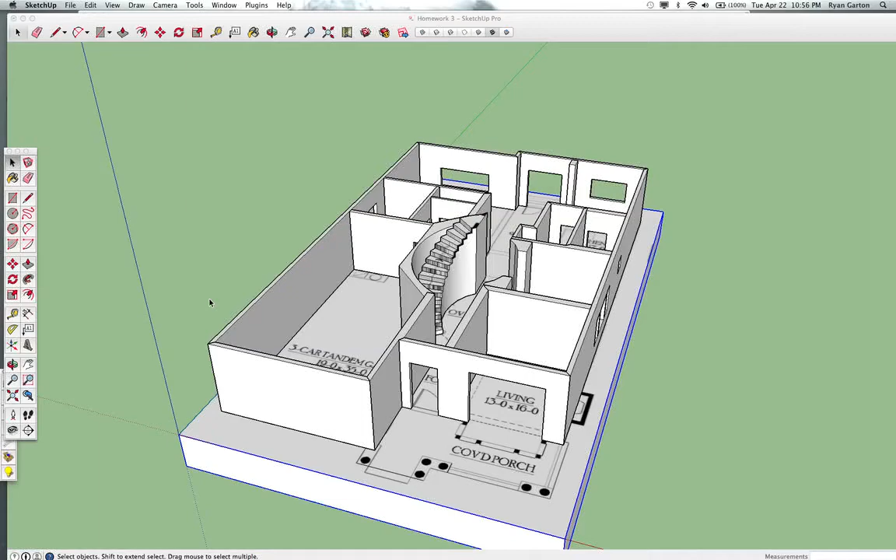Now that the hard part is over, let's do another projected texture to get our porch and start moving some of this stuff down. So I would say that the slab itself should be a separate piece from the actual ground it's sitting on. Let's go ahead and trace using this material below the slab.

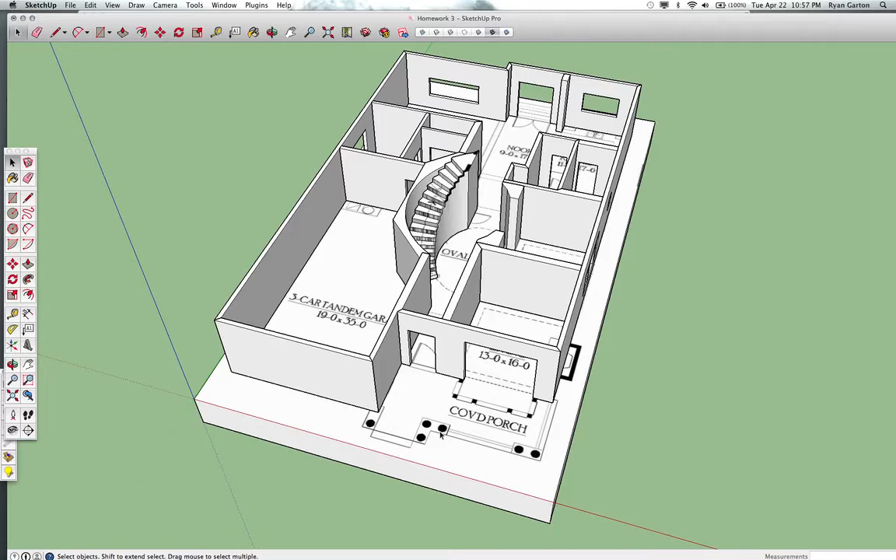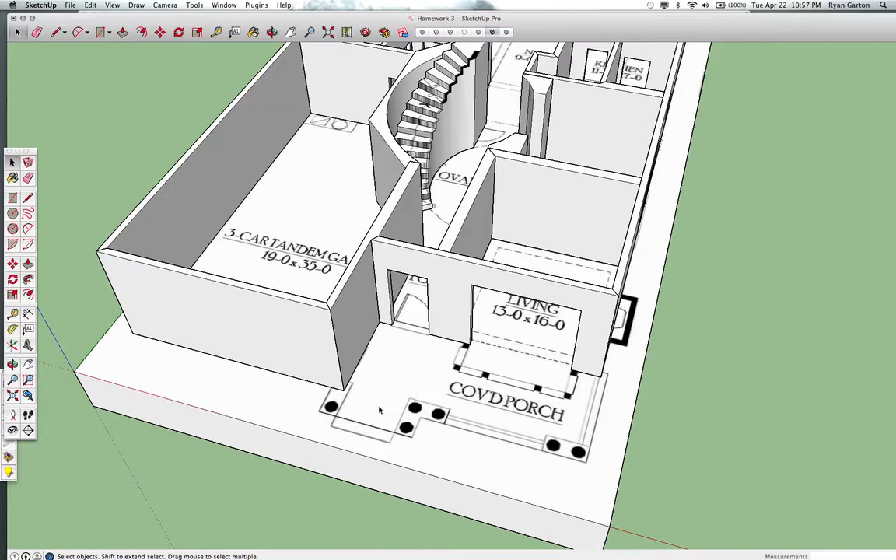There's a slight adjustment to the homework, and it might have already been adjusted on yours, but just in case: the site outside of the house is going to be minus 14 inches, not minus 3 feet. I'm not quite sure what it says on the sheet you got last week, so let's make sure we're only going down 2 steps. We'll go down 1, 2 here, and that's going to be negative 14, so each rise will be 7 inches.

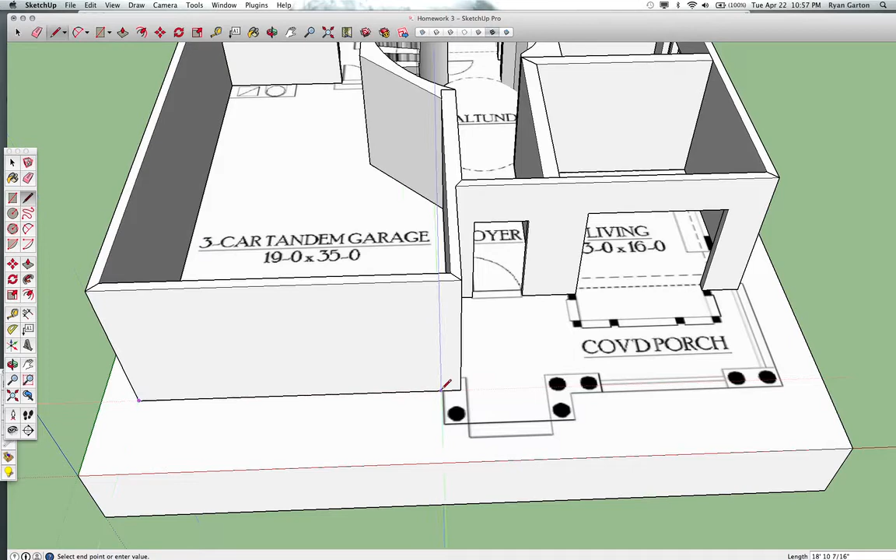What I'm going to do is start from this outside corner and trace around this entire house. When I get to this part, I'll use the material below as a guide. I'm starting from the outside corner, drawing with my line tool, and I'm going to miss this step because that's going to be a separate piece. I'll go all the way to the edge of this and click all the way around.

I'm not worried that much about how precise I am on this. Again, this isn't a real building from scratch—this is a building that already exists.

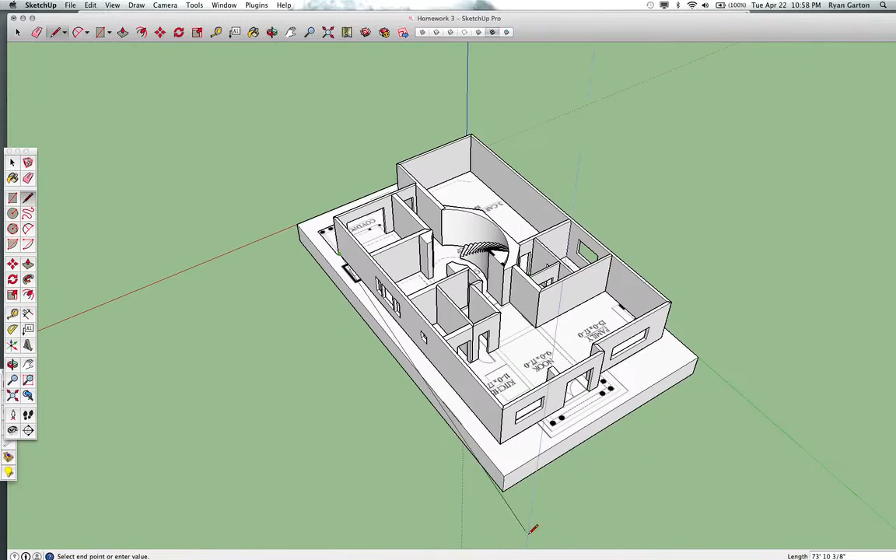I'm going to this other outer corner, and here I've got the bottom step and then the step just above that, which is basically the top of the slab. So I'm going to use that line there as my reference, and as I go around until I get back to where I began, I'm now going to double click on this and make it a group.

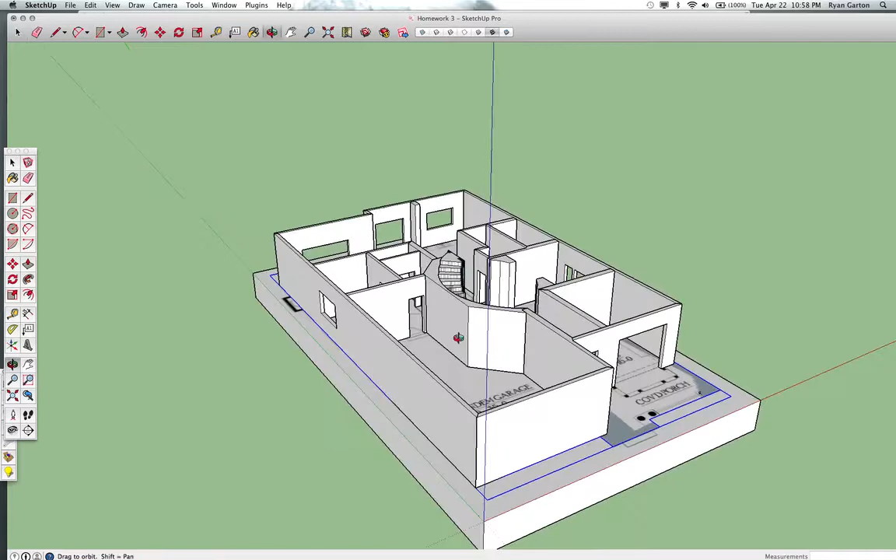Now I can take my slab, which will now represent from here on out the actual ground, and I can move this down 14 inches. Enter. This now needs—because this is my new floor—some dimension, so I'm going to push-pull it to the slab.

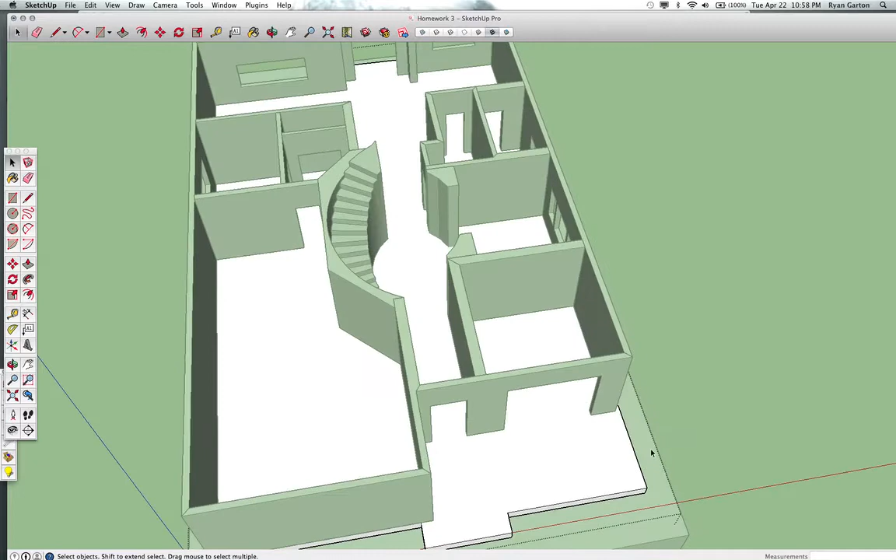Now, since this is a projected texture down below, I'm going to reference this using my eyedropper and paint it on top of that slab so that it stays right on top where it belongs. Let's see if it moves when I click. It did—same thing that I was worried about happening the first time around, and that's that it moved when I did the stairs.

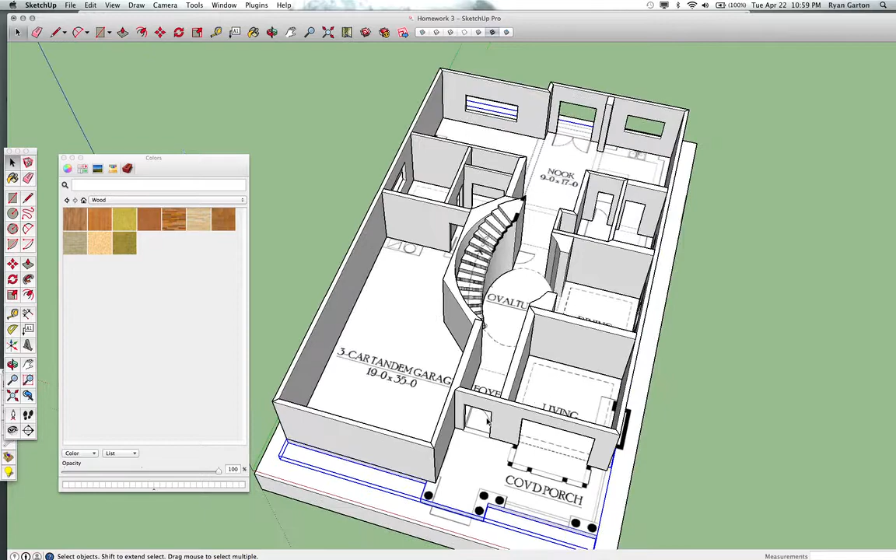So I'm going to explode that and then group it again. Now I just need to draw a little rectangle here for this step. Double click on that, group it, double click to open it, and I'm just going to push-pull it till I match that midpoint. I'm going to do the exact same thing on this side, only here it needs to be a little bit more complex.

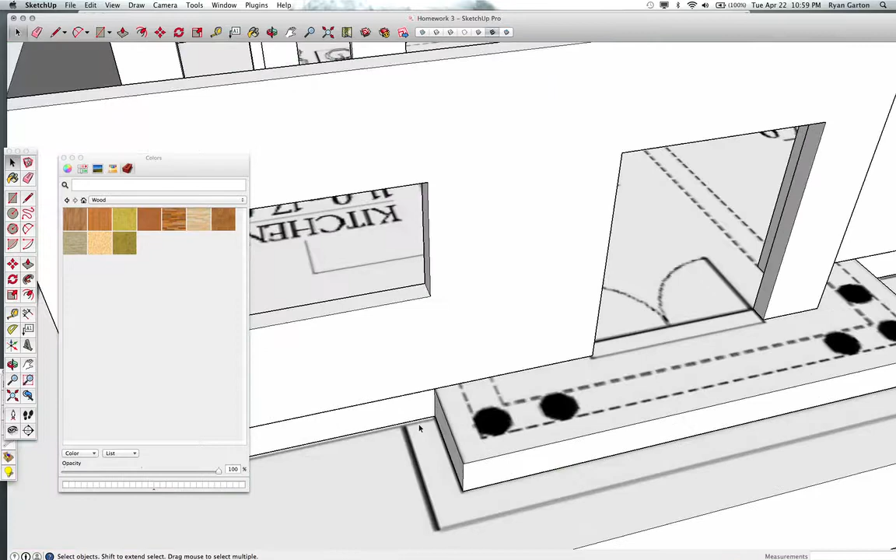I need to actually draw a line all the way around it, from every point until I get back to the inside. Double click on that, group it, double click to open that up, push-pull it till I get to that point, and close it.

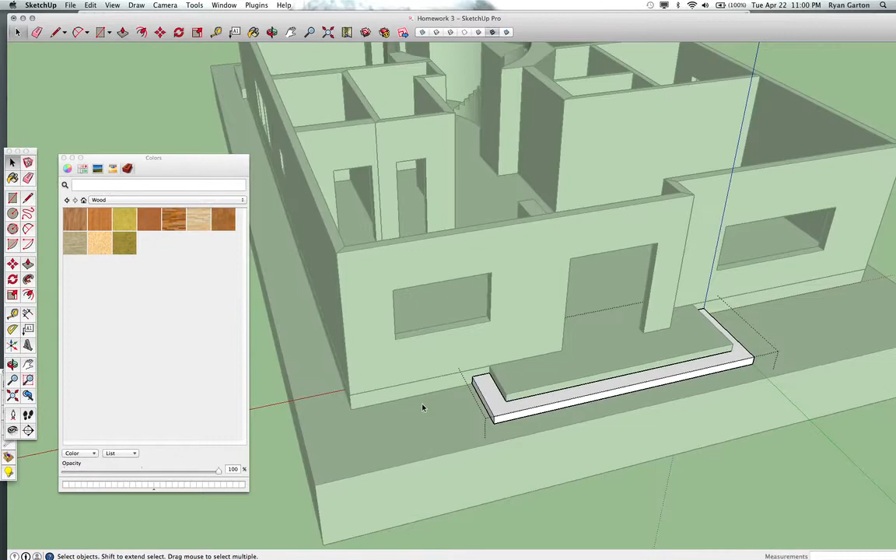Let's go ahead and get rid of that material palette—we don't need that. Okay, so now what you have is your entire house sitting on top of the slab like it belongs.

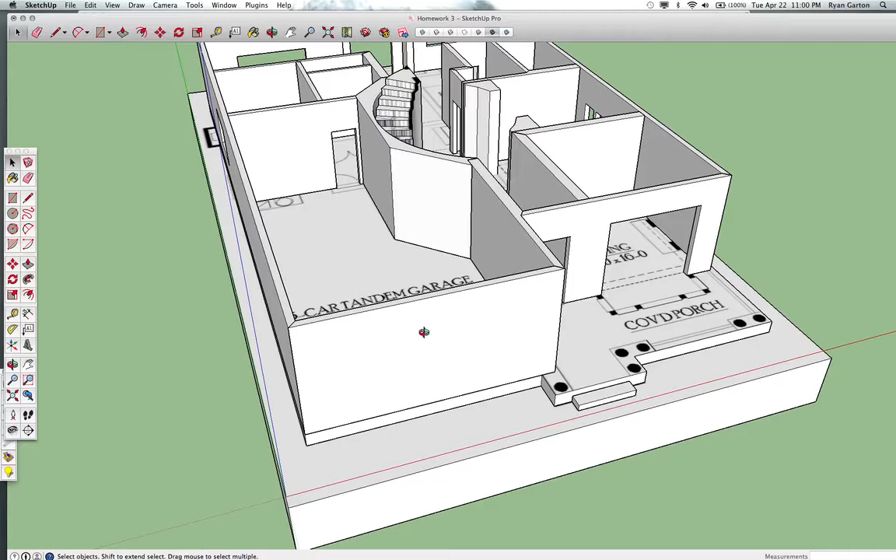But I've noticed something as I look inside this, and that is that this requires a few steps up. So it looks like what's happening is this garage is actually sitting lower in space than the rest of this. So what I'm going to do is carve away at this slab here, and I'm going to hide the outer wall so I can see what I'm doing—so I'm going to hide this wall, and I'm going to hide this wall.

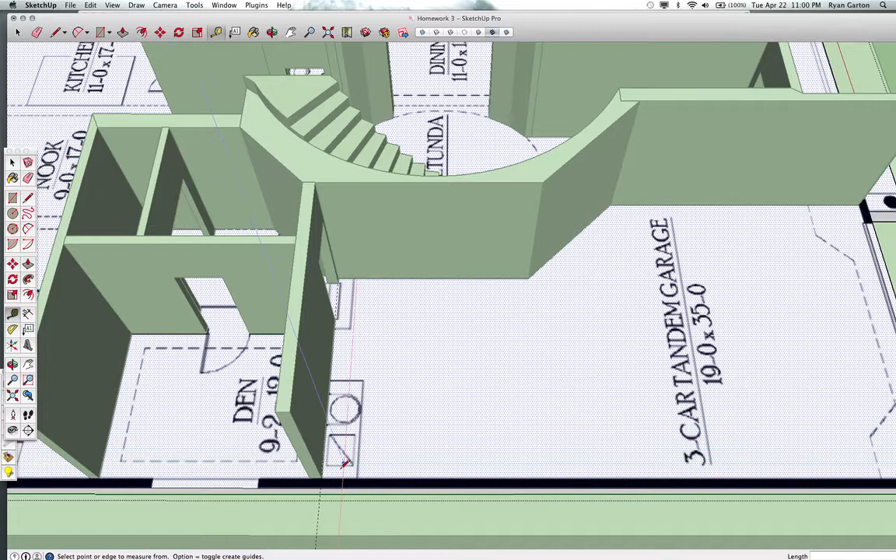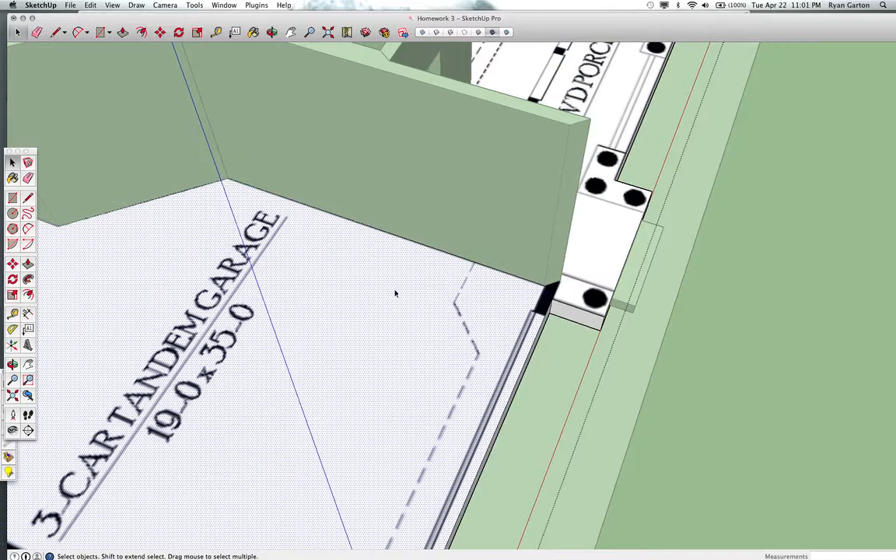I'm going to push-pull this area down, but first things first, I need to use my guides to start carving away at this, and I'm just going to go to the inside wall for now, using this inside wall as a guide. Then I pull this all the way around, holding shift down until I get to this point here—click and click again. Now I can push-pull this face away, and it'll disappear.

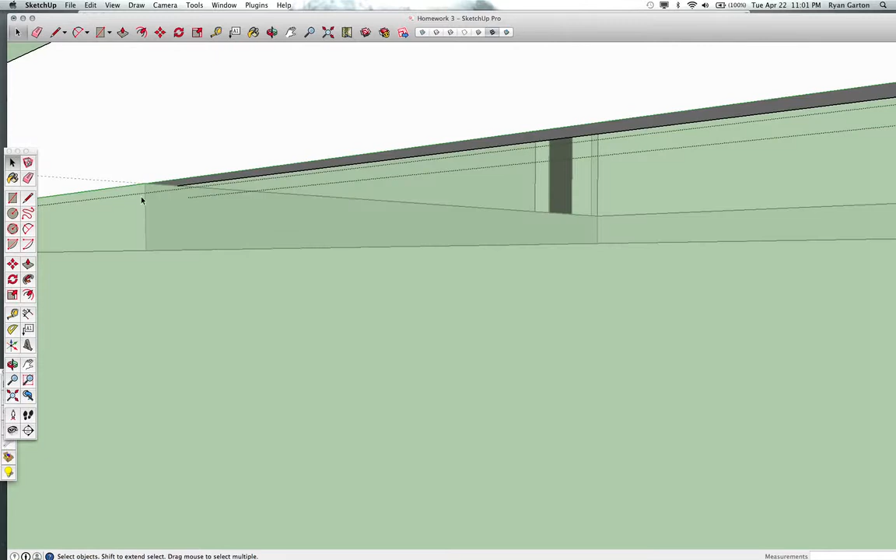Bring my garage walls back by unhiding, and this wall now needs to be extended. So I need to push this wall down, and I need to do the same thing here. But if I push it down it's going to overlap with this slab I've created. So I'm going to get underneath this, make a line from this point to that point, push-pull, and then just push-pull that piece down like that.

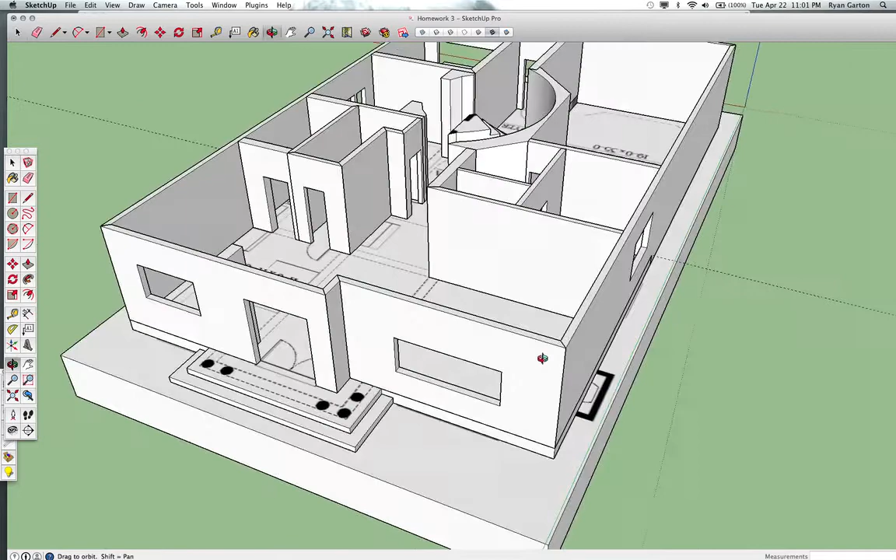Click to close. If I was making this model from scratch and wanted to be really fancy, I'd probably push the slab all the way on the inside and have the walls come down around the outside so I didn't see that line there. But I'm not that worried about it for this model, so I'm not going to kill myself.

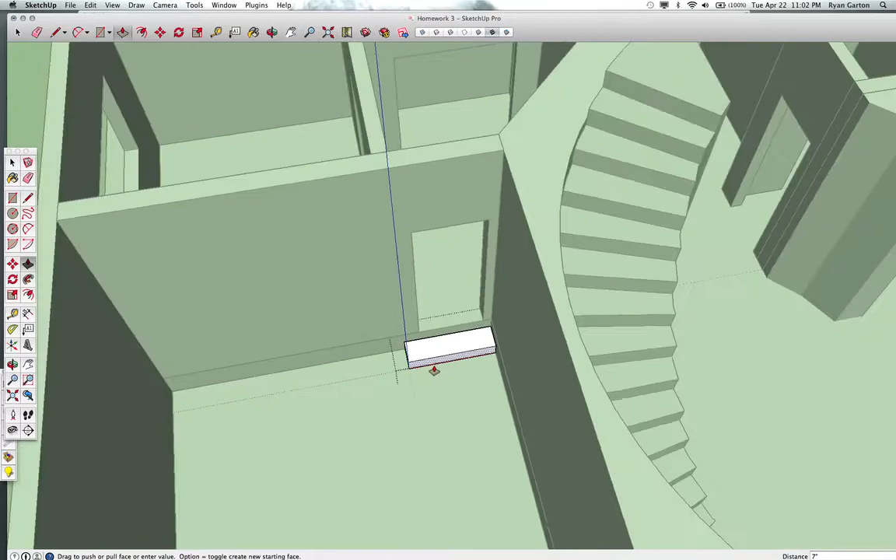Last but not least, I need to create a little step right here using my rectangle. Double click on that to make it a group and push-pull that up 7 inches, so I've got a little step to get up into that garage door. Okay, so now we have our slab and our stairs in place.

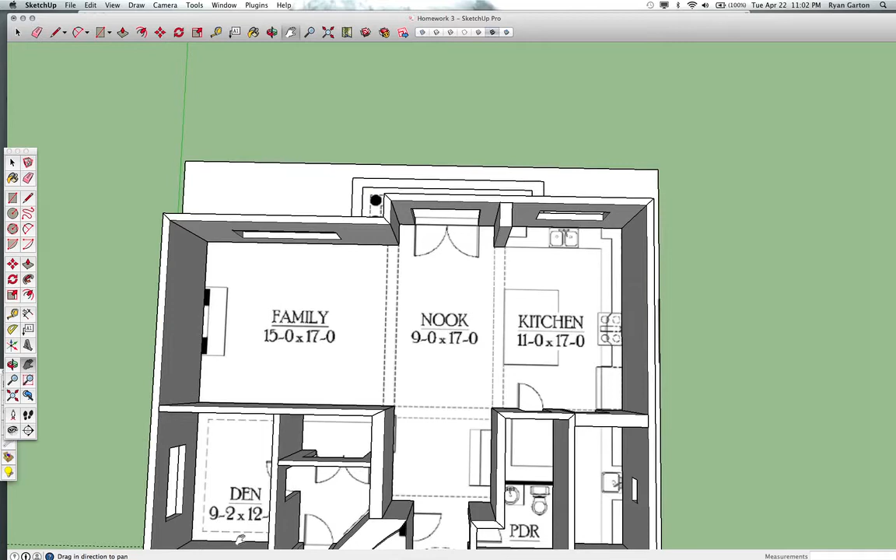One other thing I might want to do - I noticed I've got a few little areas with some soffits. I'm not going to worry about this oval soffit just yet, but I might want to put these soffits in place. I'll say the soffits are 14 inches deep. So I'm going to use my guides, snap from this point to that wall, and if I click in, I remember this being about 12 inches, so my 12 inches gets me right on that line.

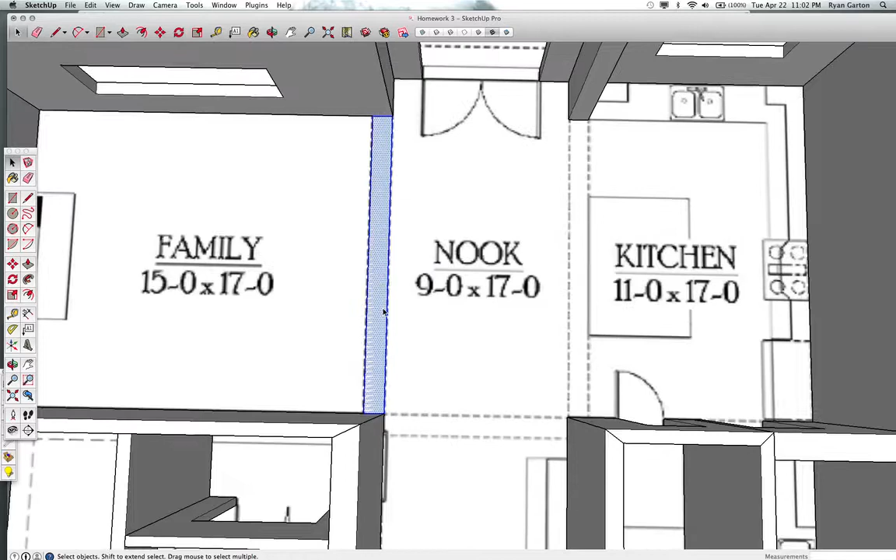I'm going to create a new rectangle, double click to make it a group, double click to open it up, then push-pull it 14 up into space, click to close, and then just drag that up into space where it needs to be.

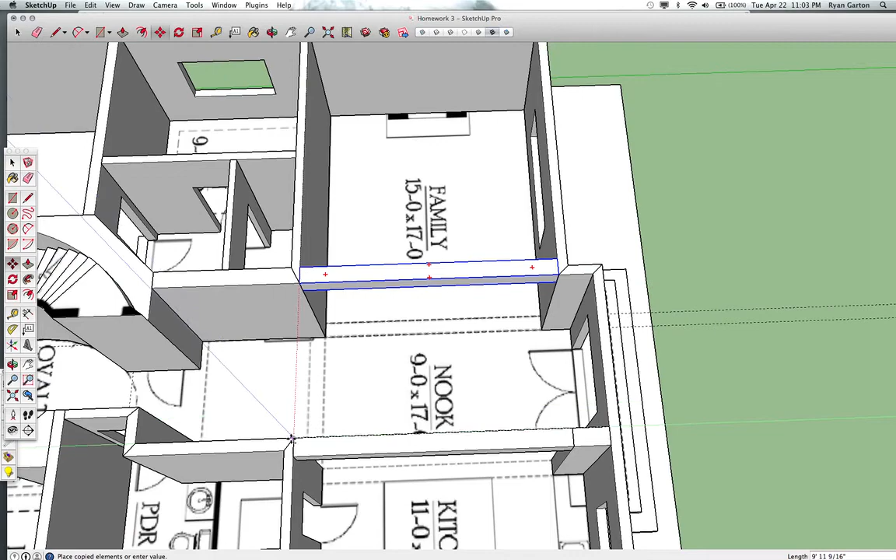I've got the same thing happening on this opposite side, so I can just use this same soffit by copying it and pulling it over like that. And then I can do the same thing here.

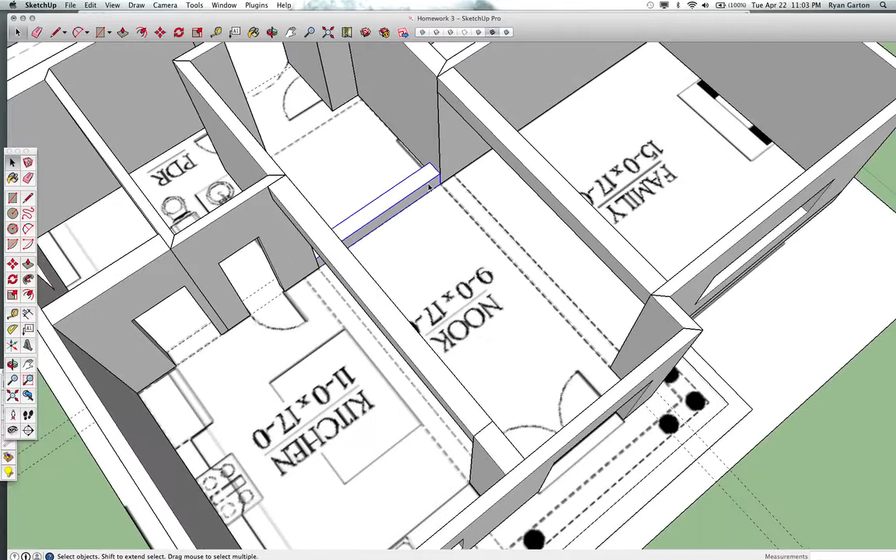I'm just going to do a double click to extend that guideline all the way across, move this out 12 inches, go with my rectangle, click from point to point, double click to make that a group, and double click to open it up, make it 14 inches, double click to close, and move that up into place.

Lastly, I see that I've got a few soffits in some of these rooms that wrap the whole room. So in this case, let's use our guide here to see how far out it goes. I'm clicking out here, and it looks like it's just about 12 again, so I'm using that guide as a reference.

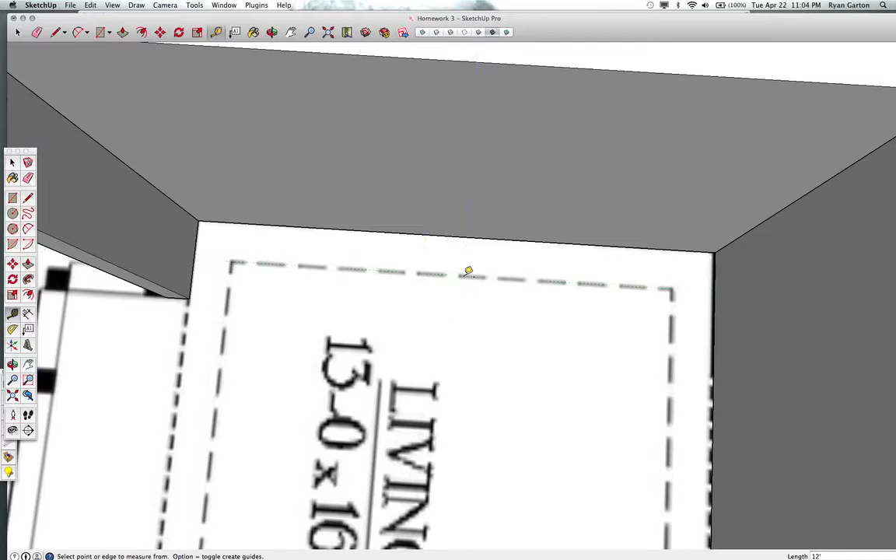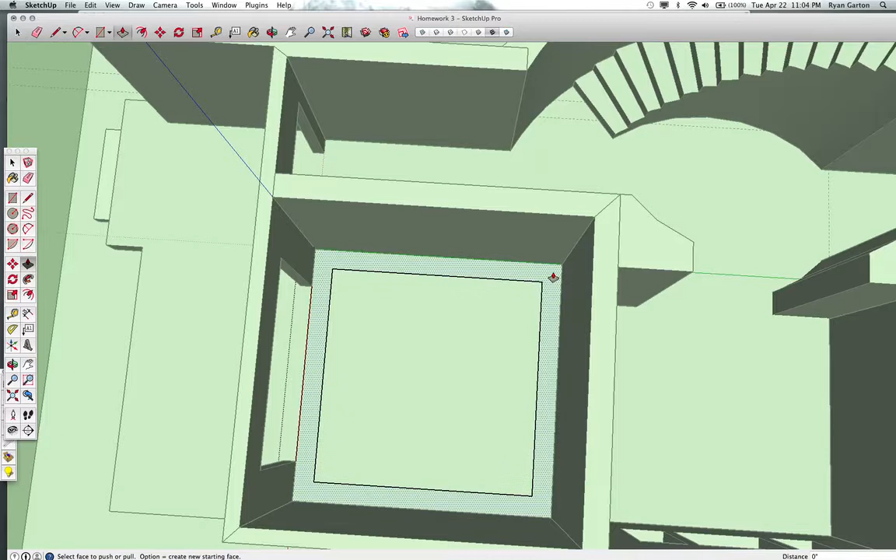Now what I'm going to do is use a rectangle, go from point to point, double click on that to select it, group it, open it up, offset using my offset command 12 inches, enter, and delete that center face - I'll hit D for delete. Now I'm going to push-pull this up 14 inches and click to close.

Now I'm going to click and move this up in space, and I'll do the same thing out here, and I can see that it's the same. So I'm going to do another rectangle.

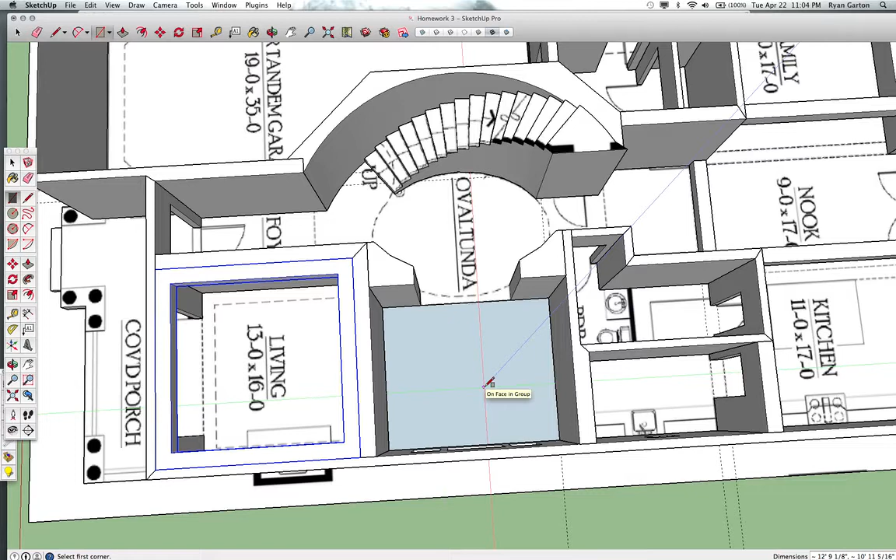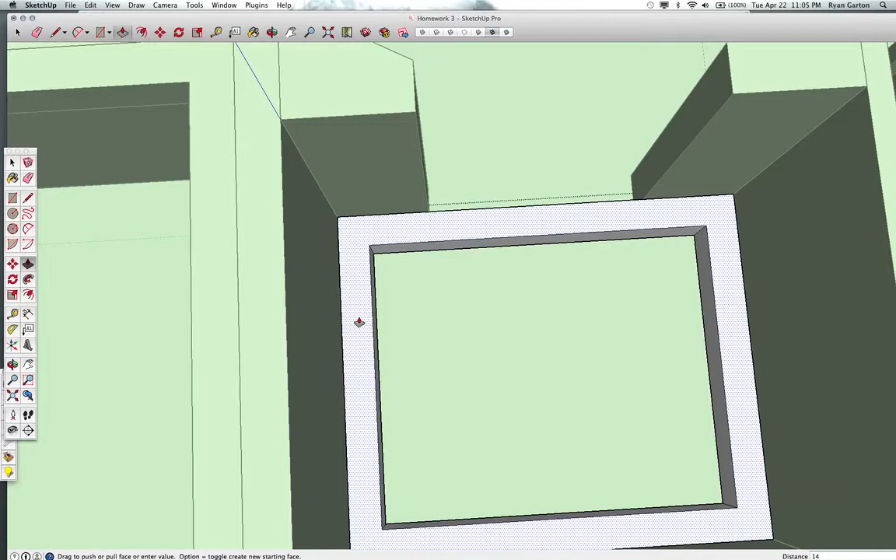Notice all of these elements are individual pieces, so I have a lot of ability to edit here. I'm going to double click on this to select it, G to group it, double click again with my select tool to open it up, O to offset and bring that in 12 inches by typing in 12. Now I'm going to double click, click on that one face and delete it, then push-pull this up 14 inches and close, and bring this up into place.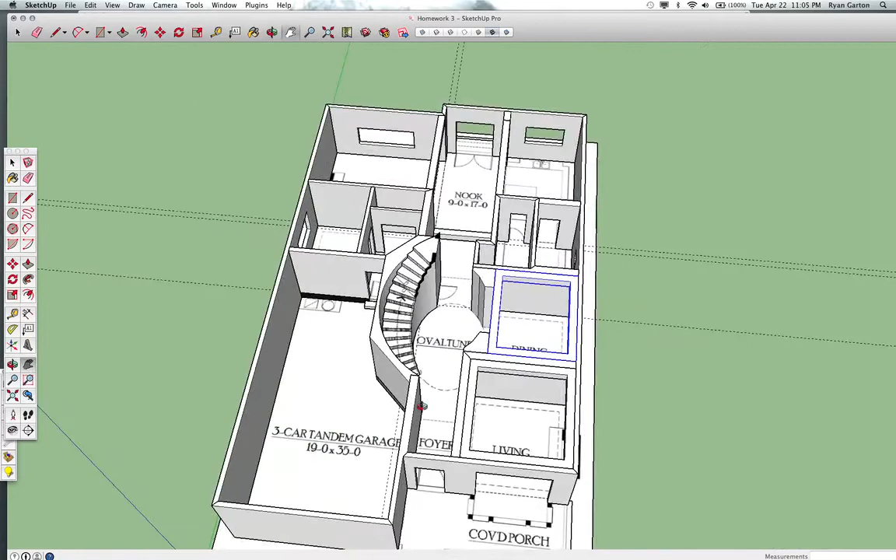So at this point we now have the majority of our major soffits and the porch and the stairs in place. If you're at this point now, you're in really good shape. We're going to move on, and I'm going to introduce you to a couple new tools, and we're going to start making this house look like a real house.